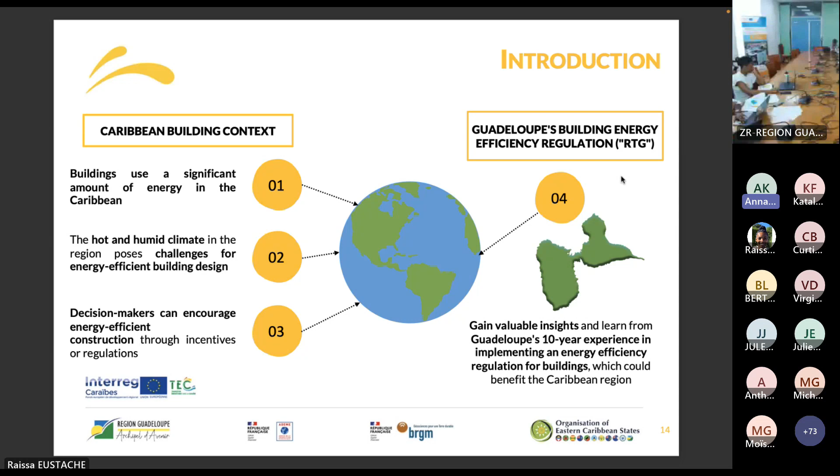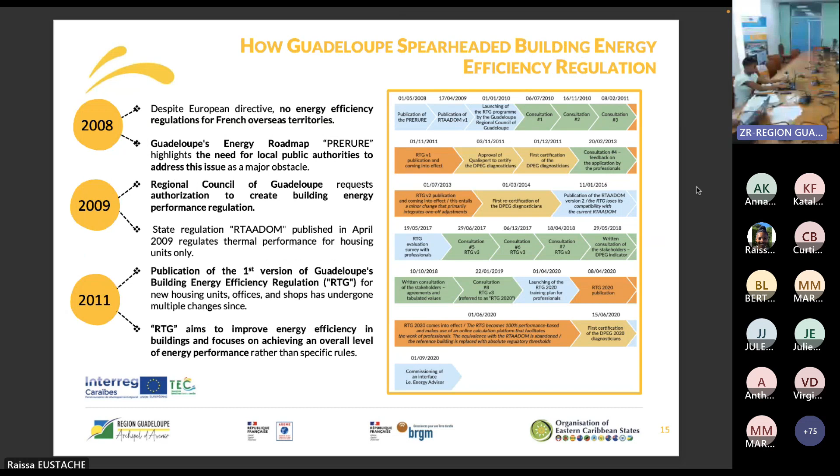And now I will give the floor to Mr. Lionel Bertrand, who is going to keep talking about the RTG and share with you further details on this interesting concept. Thank you.

Good morning, everybody. My name is Lionel Bertrand. I'm working in the CSTB, which is a Scientific and Technical Center for Building, France, which is a public research center. And I'm deputy manager of its energy environment department. And currently I work as a specialist consultant for the Regional Council of Guadeloupe.

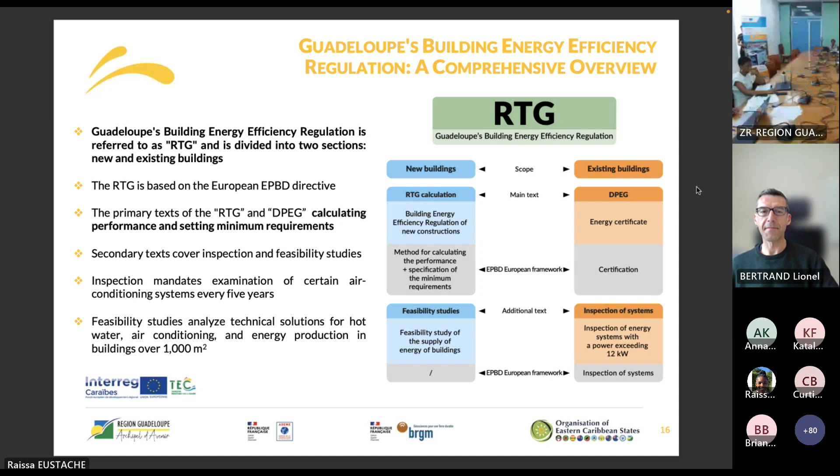The second point is that it's very important to try to live without air conditioning by using the comfort provided by natural ventilation, airflow. Orientation, windows openings are very important. The third point is if cooling is necessary, it's important to cool the building with the lowest energy consumption possible. So I'm talking about high efficiency conditioning systems and also performance of the envelope, like tightness of windows.

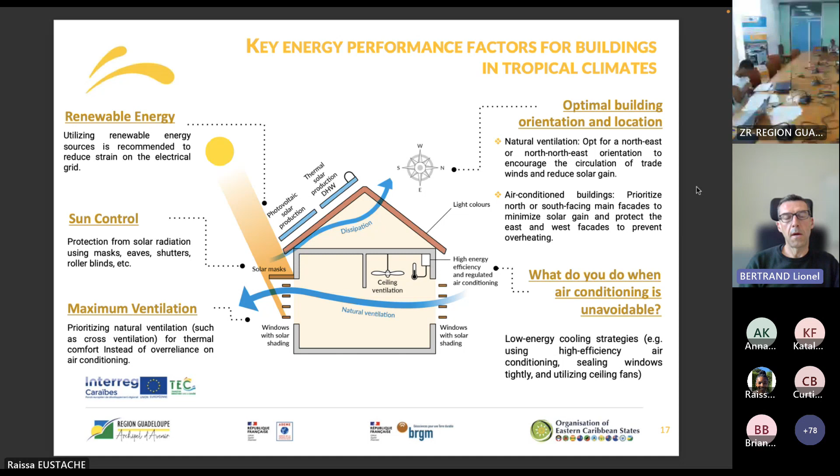The fourth key point is the importance to reduce the demand on the electrical grid by the use of renewables, photovoltaic production or DHW production. Okay, next slide, please.

Let's talk about the new construction part. We incorporated the previous key factors into the regulations, and we obtained a new set of rules that are policy fundamentals. So these are new housing. For the new housing, we must prioritize the comfort without relying on the use of air conditioning. So every new housing must be comfortable without air conditioning, no matter if there is or there is not air conditioning inside. This is the first rule that we decided. The second one was, however, air conditioning is not prohibited. It's allowed as long as energy consumption is kept to a minimum.

Now, as far as new commercial buildings are concerned, it's a bit different. The first point is to be air conditioning efficient, because air conditioning is hardly avoidable. For all new constructions, the electricity grid will provide less than 50% of the DHW needs.

Sorry. So whether it's housing or commercial buildings, at least half of the DHW needs come from renewables. It's mandatory. And photovoltaic production is not directly included in the assessment of new projects, but it can improve the DPEG score for the existing building only. So DPEG, this is another abbreviation to memorize. DPEG is the Building Energy Performance Certificate of Guadeloupe for existing buildings. Next slide, please.

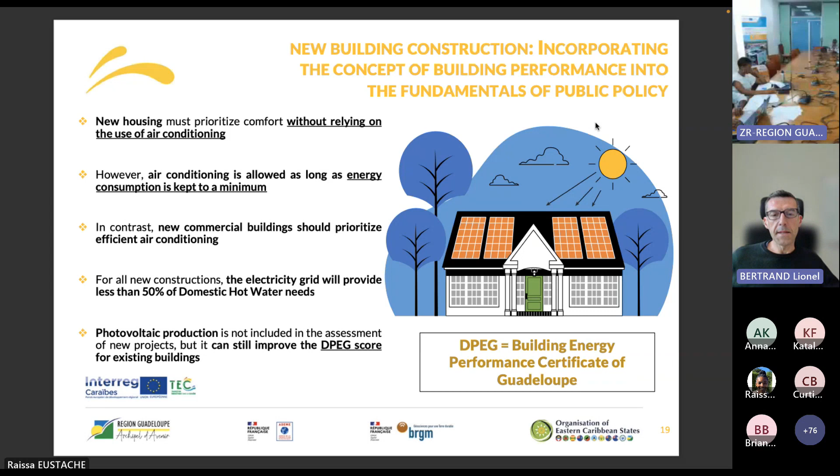Now, I must introduce the concept of what we call the performance regulations, because there are two types of regulations. The first one is the means-based regulation, and RTAADOM, the previous regulation, is a means-based obligation. The principle of a means-based regulation is that these regulations impose specific characteristics for each building component. The advantage of this kind of regulation is very simple. It's just a list, a set of rules, rather technically easy to apply, but complicated for the design exercise.

On the other hand, we have the concept of the performance obligation. The principle is this regulation imposes an overall performance standard for the building, which leaves the choice of elementary solutions to the designer. So the main advantage is this freedom for the designer. And they say that the stakeholders prefer this kind of regulation because it's possible to optimize the cost of the construction with the same efficiency and performance.

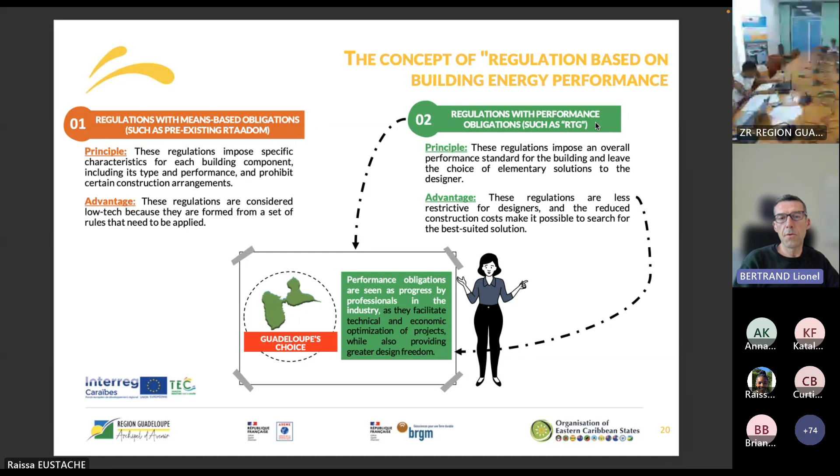You understand the difference between these two kinds of regulations is in fact the scale. Obligation at the elementary component scale or at the whole building scale. But to understand this concept, on the next slide, we will show you an example. Thank you.

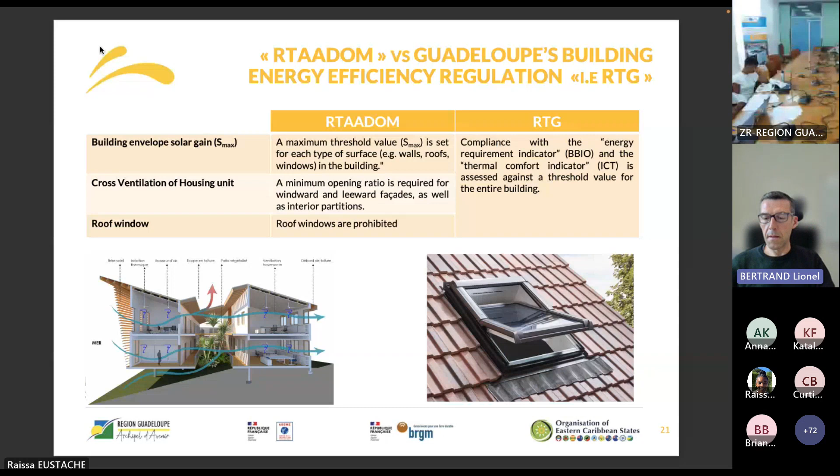On the other side, with performance obligation, like RTG, you do what you want, provided that the overall performance is proven. So there is just one calculation with the two KPIs I will present later. All right. Let's move on to the next slide.

So we decided to restrict the scope of the regulation to these three main types of building, which covers 87% of the new construction flow, but it mainly reduces the overall effort to make. So it's kind of a Pareto logic. And on the next slide, please.

In the same idea, considering that the energy consumption of a building results from the performance of the building envelope and the performance of building energy systems, and also considering that these two factors have very different lifespans. We're talking about half a century for the building envelope and around about one decade for an energy system, HVAC.

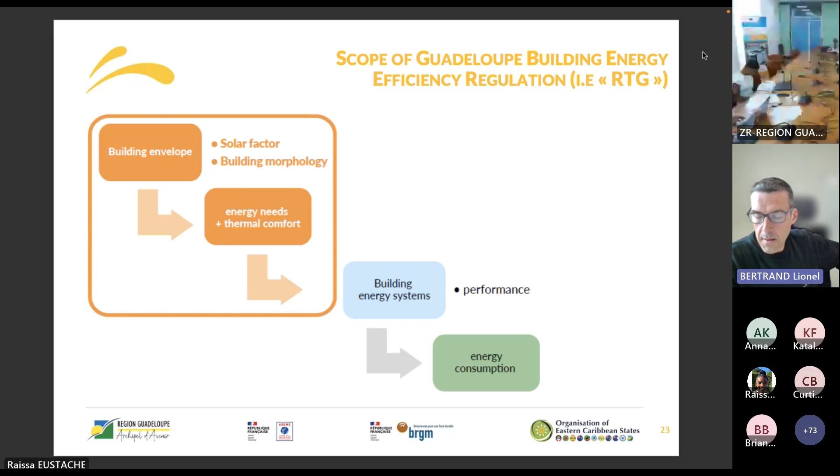So it's more important to regulate the building envelope than energy systems. So we decided to constrain mainly the building envelope and not HVAC, the building energy systems. But HVAC are included in a more simplified way in DPAG and the existing regulation, and the market is regulated. It's not possible to sell HVAC systems with less than A+ class on the Guadeloupe territory. Right.

I would like now to address the compliance test process. As you can see, we have implemented a calculation method, and this method has been implemented itself in a software tool, online tool, that is widely used by the stakeholders and the professionals. As you can see in this process chart, there are 4 main steps. The first step is the professional, the designer, defines the characteristics of the building by modeling the building in the software.

The second step is the step of simulation. The calculation tool runs and simulates the building's different physical magnitudes. Then on the third step, we calculate the values of the KPI, in line with the regulation. I will present this KPI later. And the last step of the process is the test of compliance, and the KPI must be under the threshold value to be compliant. Right?

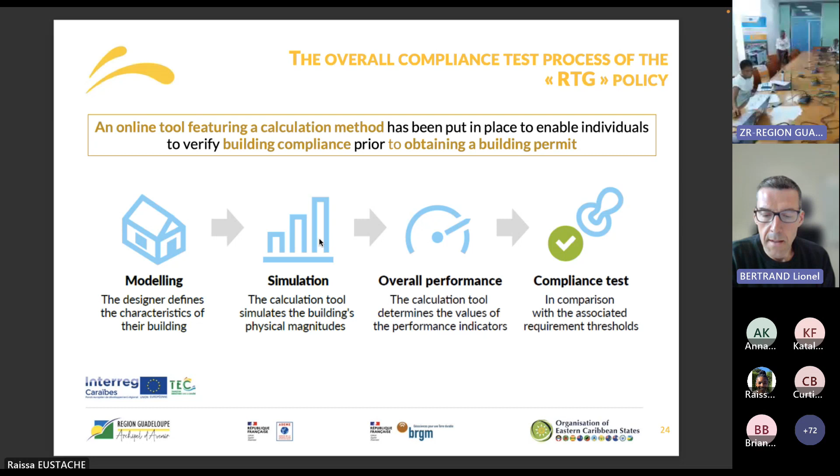Now, the next slide. Let's have a look at these KPI. There are 3 KPI for RTG. I will present them to you. The first one is ICT. It means thermal comfort indicator. It's about the thermal comfort consideration for non-air conditioned mode. So it's expressed in degrees.

The second KPI, BBIO, means energy requirement indicator. It refers to energy efficiency of the building envelope, and it's expressed in kilowatt-hour per square meter per year. And there is a third KPI for the DHW called the PRDHW. It's about the energy consumption for domestic hot water, and it's expressed in percentage. Just these three KPI to quantify, to assess the compliance of the building.

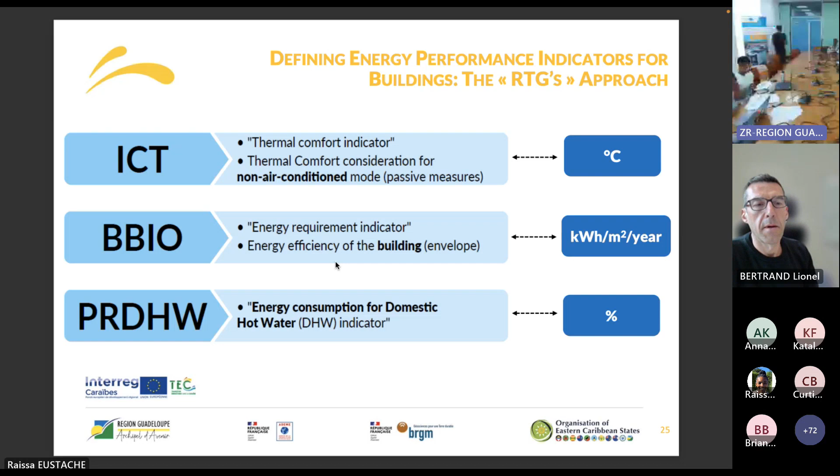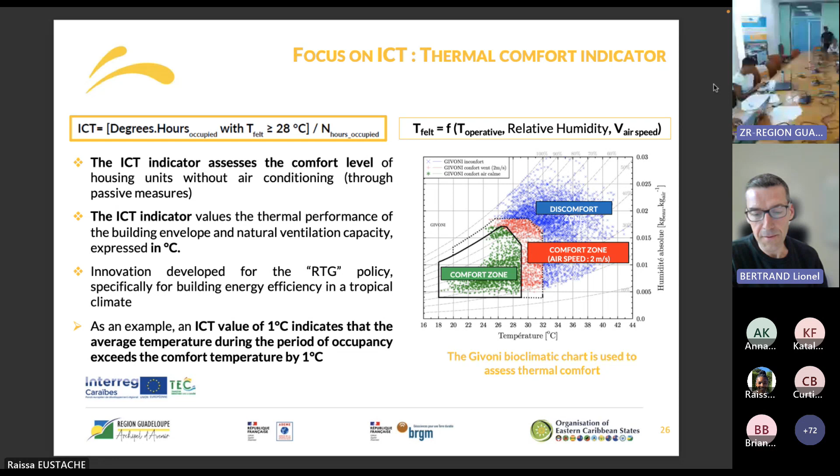Then I propose to do a focus on the ICT KPI on the next slide, please. Because it's probably the most innovative KPI we have designed, especially for Guadeloupe. You can see the formula of ICT, and this formula uses another secondary KPI called the T felt, which is the temperature felt by the occupant. And this is inspired by the Givoni psychrometric diagram, and it takes into consideration the operative temperature, the relative humidity, and the airspeed. So if you want to go further in this way, there is a special technical sheet in the handbook. So I propose to continue with the next slide.

There is another concept to introduce, which is the compliance condition, because first of all, the compliance condition was based on the relative method. So the test was the real project must be more performant than the reference project. So what is the reference project? The reference project is in fact a virtual building which we have reconstructed from the real building by replacing some of its characteristics with a regulatory reference value taken from RTAADOM for each part of each component of the building. But this is done automatically by the software. So it's very easy to build.

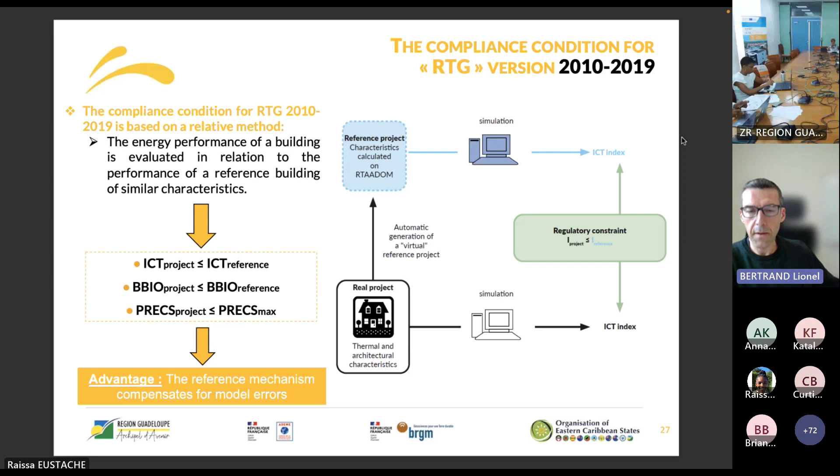So I explained it to you. The user models his building, it creates a real project. The software generates the reference project, and each one is simulated, and the real project must beat the reference project. So this logic was used from 2010 until 2019, and in 2020, you can see on the next slide, we switched to another logic, which is an absolute condition. So the reference project disappears, and there is just a very single rule to satisfy on the left-hand side with the threshold values. Almost static values, not exactly, but almost constant values.

And this can be done only when you have very heavy feedback from the regulations and the results of the different simulations of the project. And we had to wait almost 10 years to do it. And this is a better method, because now the architecture, the shape of the building, is taken into consideration in the score. And before it was not the case. It's a bit complicated to understand why, but believe me, it's a real progress to switch to this kind of regulation, but it requires a very good knowledge of the building stock.

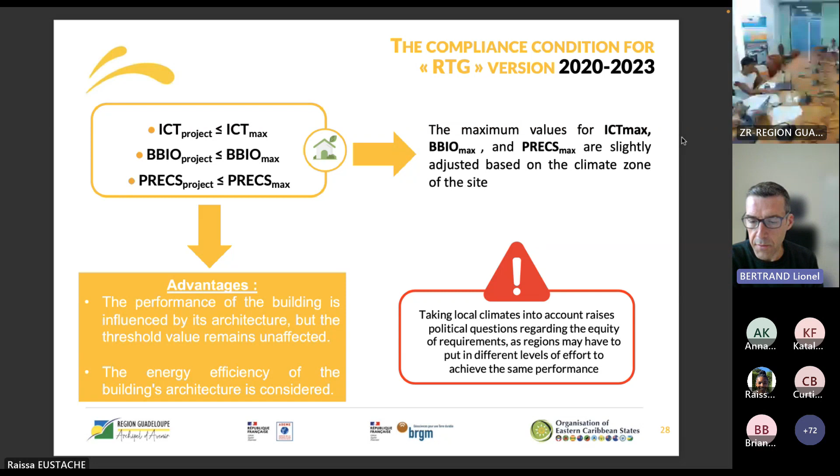All right, I think we can go to the next chapter. The next session is about action on existing buildings. And for existing buildings, the Regional Council of Guadeloupe made 3 main decisions at the beginning.

First of all, it's a fact that the retrofitting rate in Guadeloupe is too low. So it was not a good idea to constrain the retrofit with other regulations. So it was decided not to develop a regulation on the act of retrofitting. But instead of this, the disclosure of the building performance through the energy performance certificate, DPG, was decided, because it's some kind of hidden characteristic of the building.

And the idea was to disclose it as requested by the European directive, and the objective is to encourage energy retrofit, but not to constrain it, by using the real estate market mechanism.

The third point is that by the use of the simulation method, the simulation tools, and so on, we can generate a lot of data about the building stock. And we decided to establish an observatory for energy and climate, fed by all these data generated by the regulation tools. And we have thousands of buildings very well described now in this observatory. Very useful for decision making for public policy.

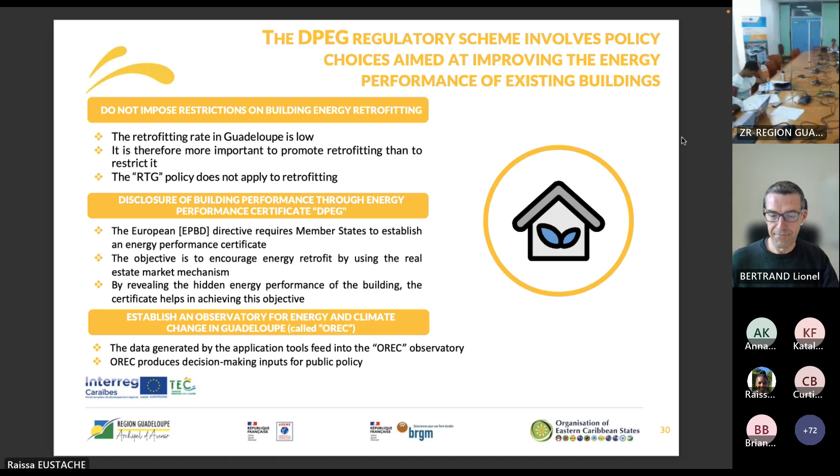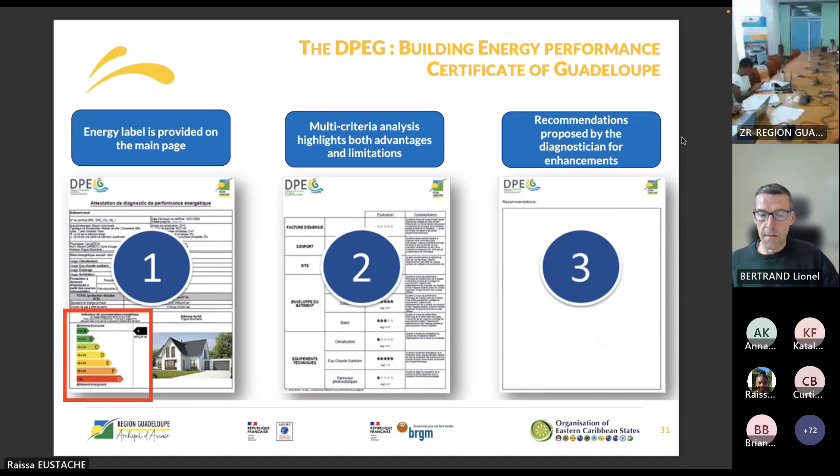It's important to say that this calculation is made with the same method and software as the new construction. The two methods are exactly the same, the two simulation methods.

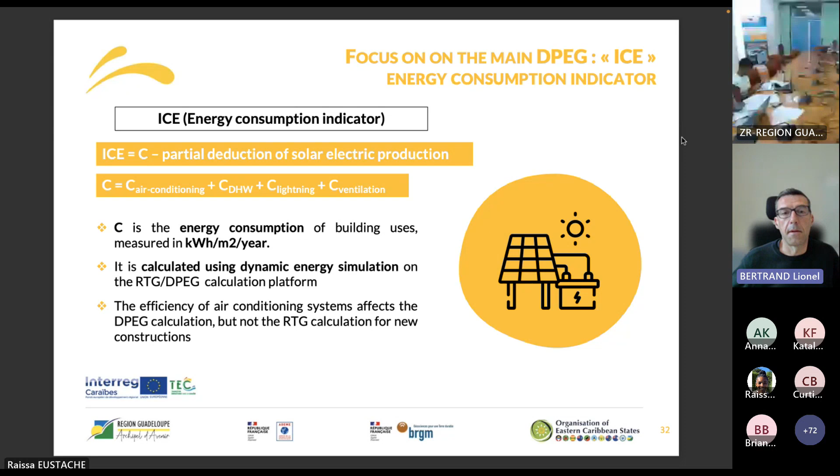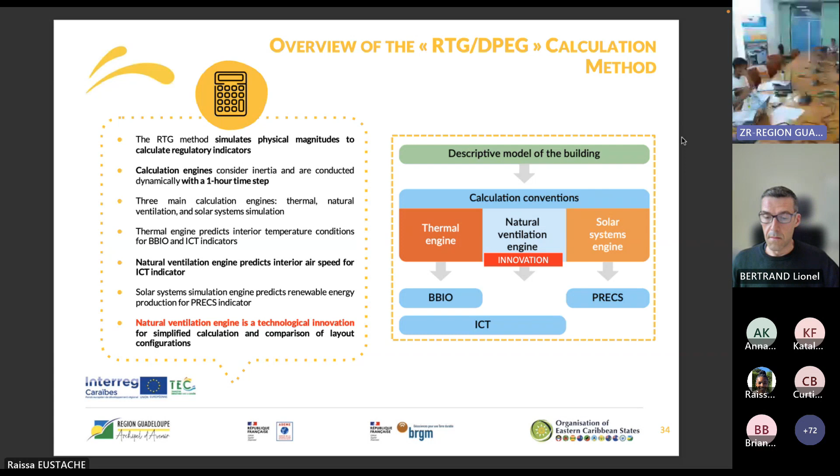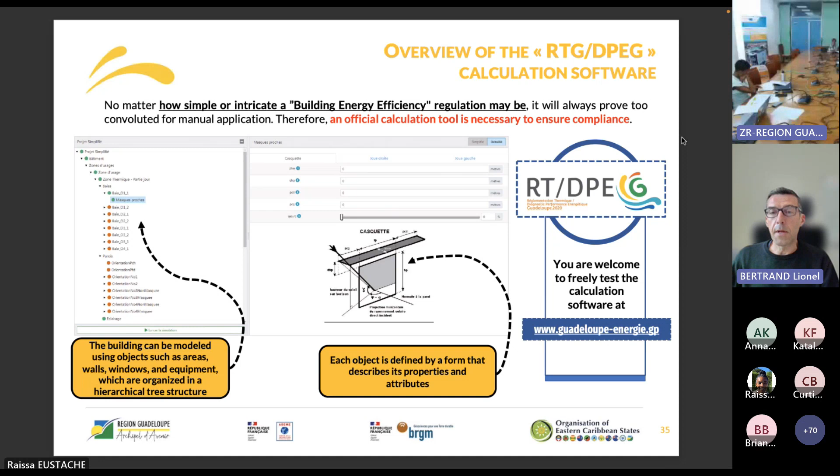Then, very important to tell you that this software, you can freely test it online. Here is the address, the URL. You can use it and test it freely. It's open for everybody.

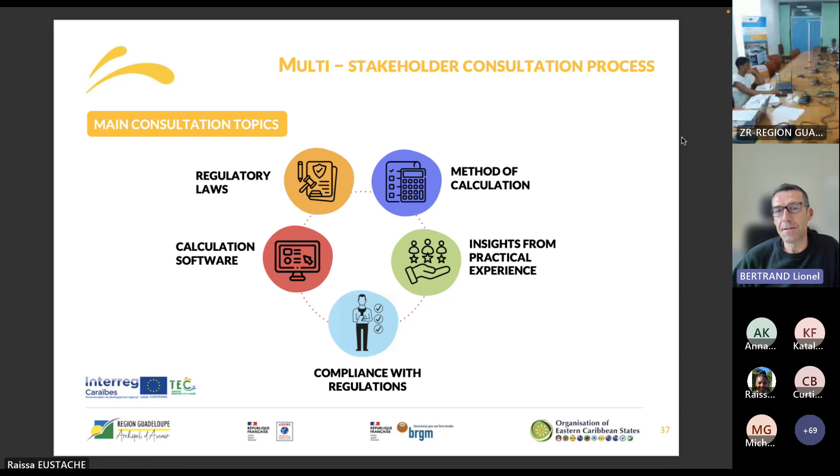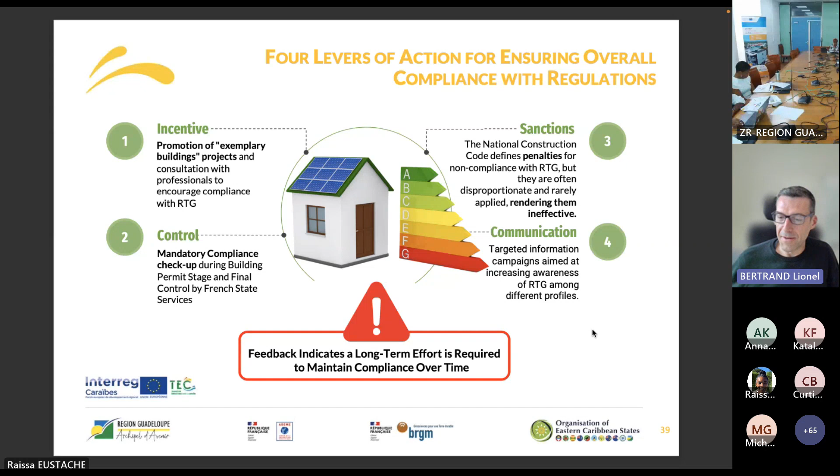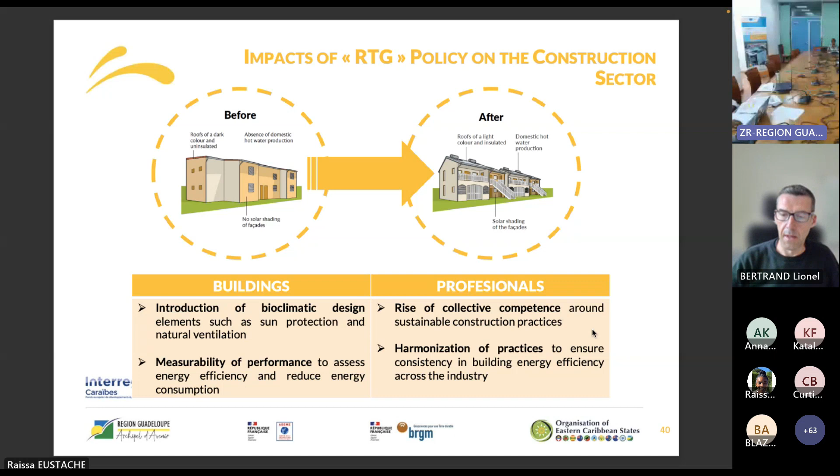And we arrive to the conclusion. I would say that, as you have seen, this kind of regulation construction is a long-term task, and it requires careful consideration. I've talked a lot about bioclimatic design, which is an important fact. Technically, also the importance of being able to measure the performance itself, very important.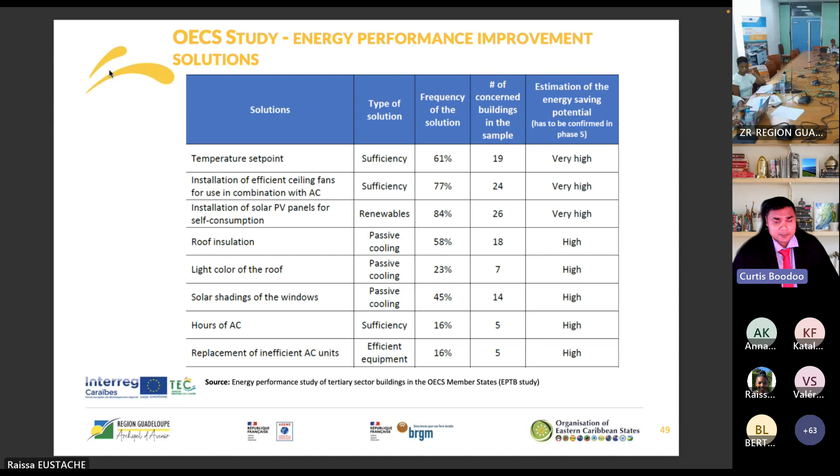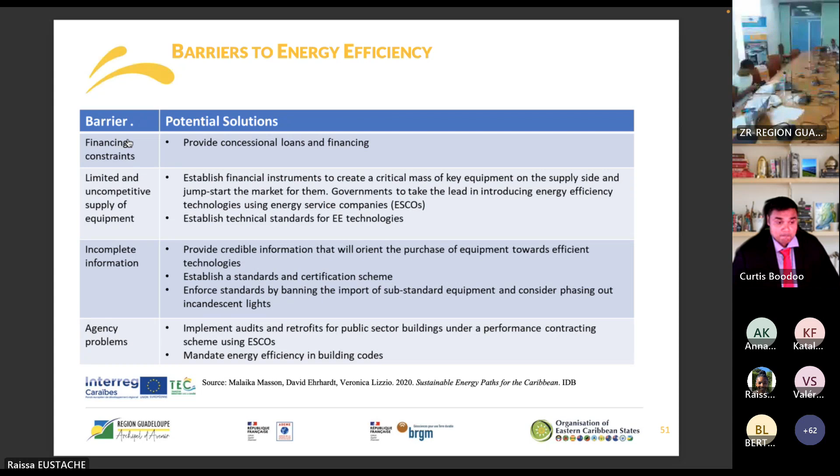So we could see that there are a lot of opportunities for the Caribbean building sector in terms of different solutions, such as, as you said before, implementing audits, establishing technical standards, and so on, but also in terms of job creation. Moreover, on this matter, we have with us Mrs. Barnier, who is the manager of the Green Affaires Antilles Guyane company. She will speak to us about the impact of the building energy efficiency regulation in Guadeloupe for the stakeholders and companies, and how this policy improved the techniques of construction in Guadeloupe and project management. So I hand over to you, Mrs. Barnier, and thank you very much.

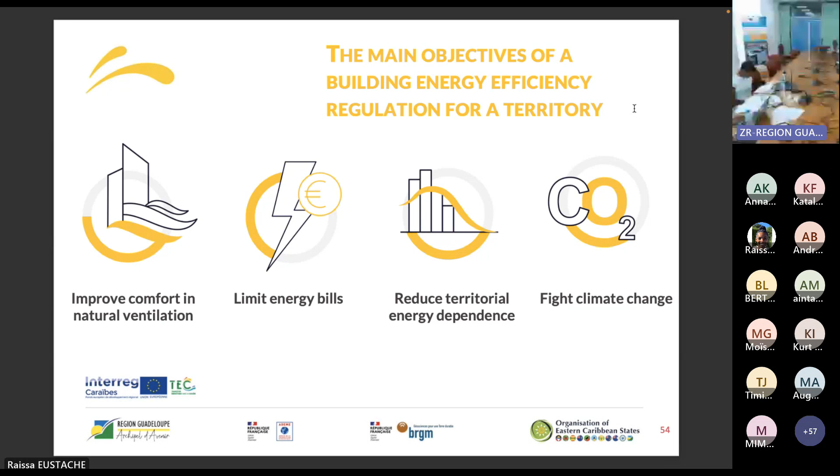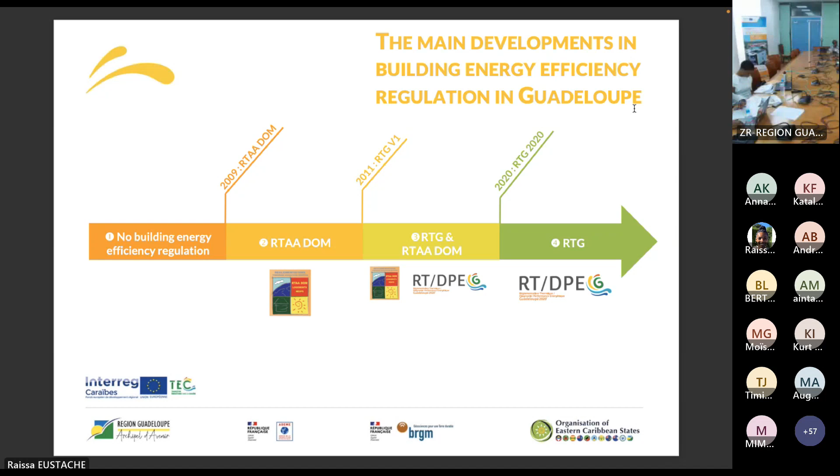As previous speakers have explained to you, we now have a building energy efficiency regulation in Guadeloupe, but the road has been long. There were intermediate steps, and I'm going to tell you how it affected the management of construction projects. I've broken it down into 4 main phases. Let's talk about the first period. It was before 2009. Sorry. Okay. Perfect. No French building energy efficiency regulations are applicable in our latitudes. The Caribbean climate zone is not integrated into metropolitan regulations, and building energy efficiency regulations are mainly focused on limiting heating consumption. As shown in the photo, we don't have winter, we don't have snow on our beaches, so we don't have heating in our houses.

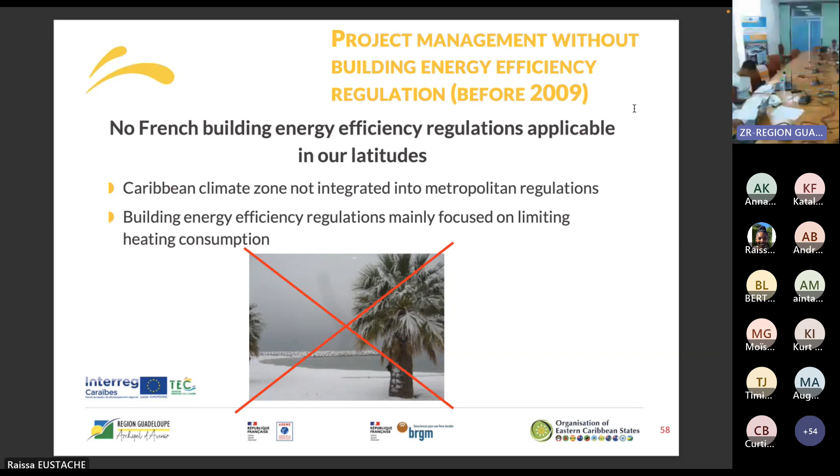So during this period, energy efficient practices are subject to the goodwill of the project owners or architects. Limiting investment costs takes precedence over limiting energy consumption. Engineering design offices are requested late or even not at all on projects. So they are only able to make very few recommendations about the building itself, orientations, insulation, choice of materials, etc. They are often able to make recommendations on equipment only. We have seen very few integrations of renewable energies such as solar hot water production, and sometimes it was on unsuitable architecture. In the end, we have seen few energy efficient operations despite some good practices in housing resulting from traditional architecture.

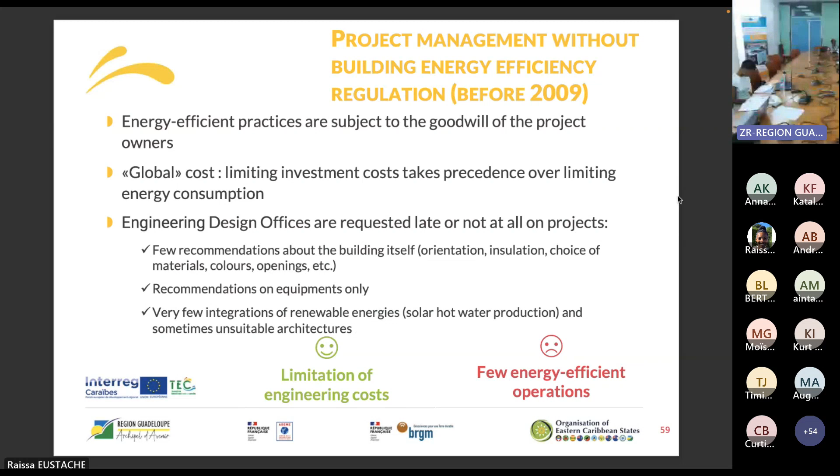Now let's talk about the second period, between 2009 and 2011. We got RTAA DOM, the first building energy efficiency regulation adapted to our territory. The name is in French, so I think I don't have to translate it, sorry. But this regulation concerned housing only. RTAA is a regulation with a means-based obligation. Its application is relatively simple and remains mainly the responsibility of architects. Project optimization remains very limited, and the additional costs generated are significant. The engineering design offices are little used, so the engineering costs are limited, but investments are not optimized, and the additional costs are significant. Only housing operations are impacted by this change of practice.

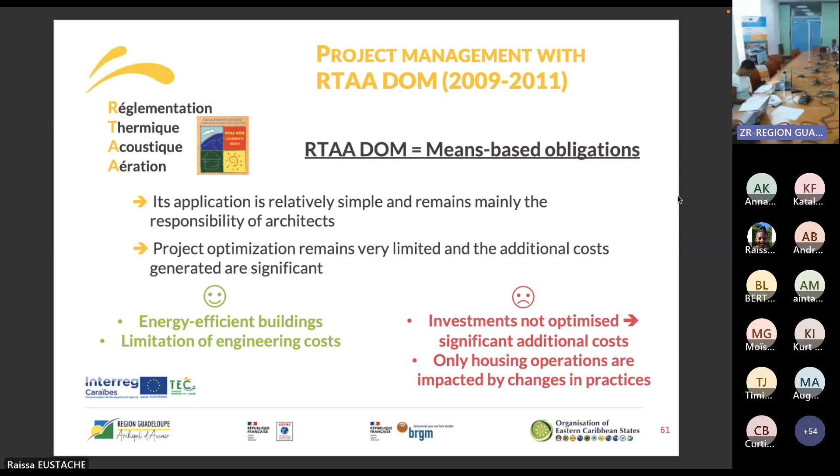Now let's talk about the third period, between 2011 and 2020. The RTG is finally born and is applicable for new types of buildings, such as commercial or tertiary. RTAA is still available for housing operations, so project leaders can choose the RTAA if necessary. Let's talk about the RTG. The application for new construction requires a certification level 2. So there is a need for a certified professional on every project, but we see an increase in skills of technical stakeholders. The quality of studies is guaranteed.

The application of RTG is the responsibility of the project owner. So they are involved in the energy subjects by contracting with specialized engineering technical offices. Project owners finally make energy efficient investments, but engineering costs increase.

The RTG is a regulation with performance obligation, so the choices made for the building can be optimized to get the compliance. We finally get energy efficient buildings with limited additional costs. I admit there is an engineering cost, but they are much, much lower than the additional costs on buildings.

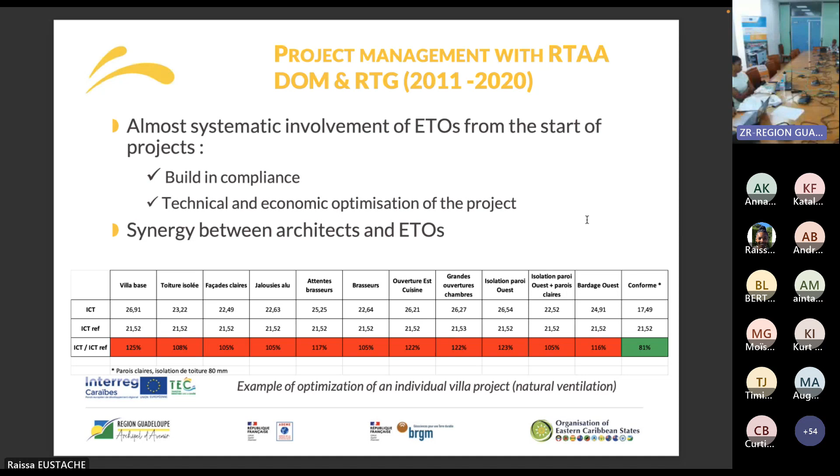So let's talk about the first period. So it's since 2020. There have been changes with the RTG between 2011 and 2020, but they did not affect the management of construction projects. But in 2020, I must say that there was a little revolution. Obligations and procedures were modified, deeply modified.

Certification is no longer required to use the platform in the new building version, to carry out studies of new buildings, to edit certificates of conformity, and to edit the Energy Performance Certificate, DPEG. A wide panel of professionals can now apply the RTG: architects, technical staff or general companies, home builders, designers, etc. But on the other side, studies can be made by unprofessional people, and they are not always reliable.

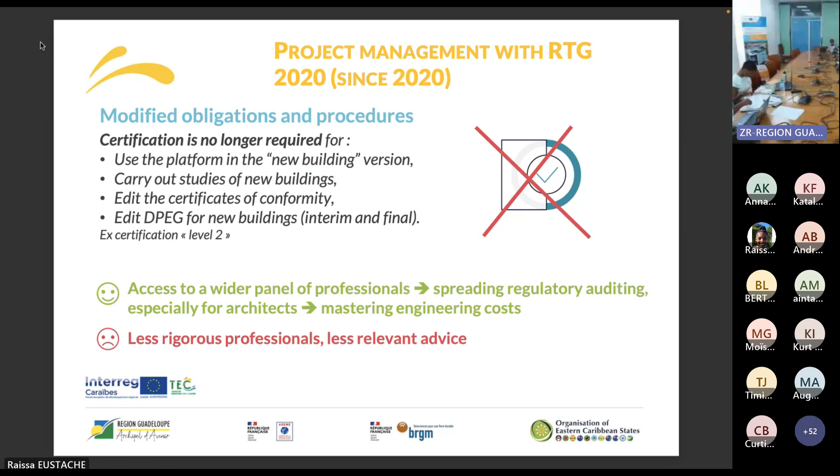There is another big change about the building permit. It is now required to perform the calculation before the building permit deposit. A certificate of honor is no longer enough. The regulatory audit is carried out at the outset of the project. There is less risk of having a non-compliant project in the advanced design phases.

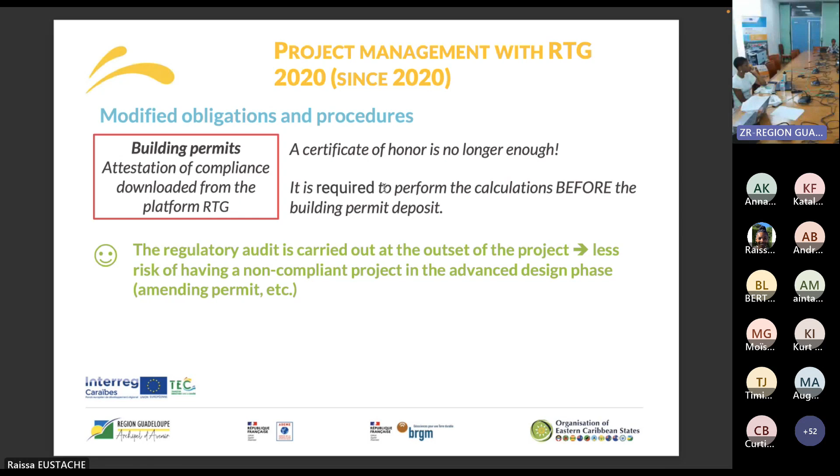Normally, to be truly compliant with the regulation, a final energy performance certificate, DPEG, has to be edited at the end of the construction. But I must say that few project owners will consider it necessary to have the conformity checked at the end of the projects.

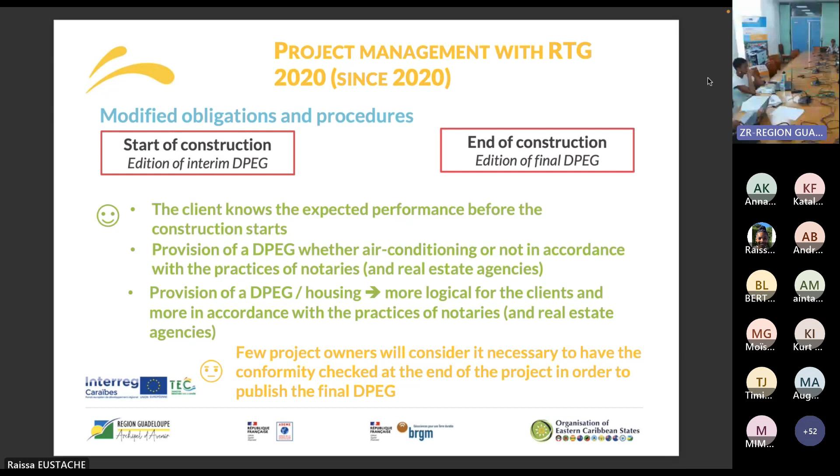The practice itself has evolved. The RTG is more challenging as a regulation. The approach is now 100% linked to performance. Compliance is more difficult to achieve and requires implementing energy-efficient construction practices. But sometimes finding solutions to the non-compliance is not always obvious to ensure the financial balance of the transaction.

Now is my conclusion about all this. So this regulation, the RTG, is adapted to our territory. Bioclimatic good construction practices are more and more widely disseminated. Engineering costs associated with the regulatory calculation are controlled, and additional construction costs are controlled as well. I must say that the RTG is generally known, accepted, and respected.

The project promoters can now offer comfortable facilities with reasonable energy bills, resilience and adaptation to shortages, and a positive environmental footprint. So the projects will be more attractive, and we all know that if the operation is attractive, it's possible to increase rents and sale prices.